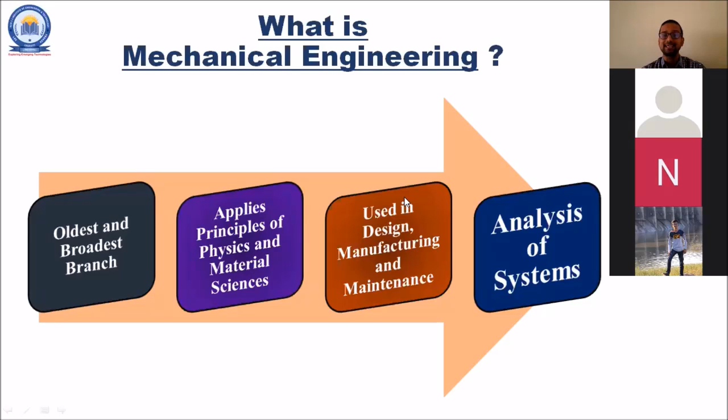Okay, no issue. So next, in mechanical engineering, basically it is also used for the analysis of mechanical systems. And friends, being the engineer, whenever we are designing or developing any product, we need to check the performance of the product. And for the performance, there must be the application of analysis. So basically, mechanical engineering is also used for the analysis of systems.

Proceeding further with the next topic, that is the applications of mechanical engineering. So dear friends, the first and the simplest application of mechanical engineering is in the field of automobile engineering. Right now, majority of automobile engineers are using the concepts of mechanical engineering.

At this point, let me ask you one question. Since you are the students of computer engineering, how can the use of computer engineering be applied to the automobiles? Or I am repeating the question, what is the use of computer engineering in the automobiles? So kindly give me your answers in the chat box.

Okay, Devers has given the answer: we do it for the self-driving and all. Okay, embedded systems are applied in the automobiles. Very good answer. To set up the software in the cars. Okay, that is also one of the answers. Digital screen, one of the good answers that now we are seeing on our dashboard. Also, the applications of robots and artificial intelligence, very good.

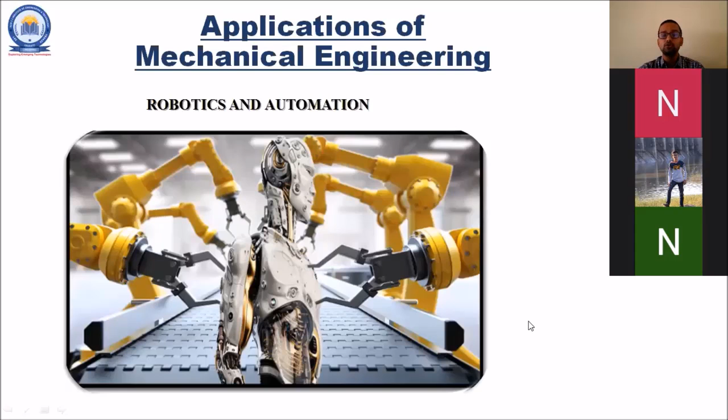Fine, fine. So this session is very interactive and I hope you are understanding all the points. So proceeding further, now this is one of the interesting questions. Whenever I explain the subject to computer students, the first question in your mind is, sir, we are students of computer engineering, so why do we need to study the subject of basic mechanical engineering? Let me know from you how many students were having this question before attending this lecture. Please reply in the chat box. How many students had this question before attending this lecture?

Okay, one of the responses I have got. Dev has also replied to me. Very good, Divya Panchal has given a reply. Some of the students are raising their hands. Okay fine, very good, so you are having this question, right? So now let me clear your doubts.

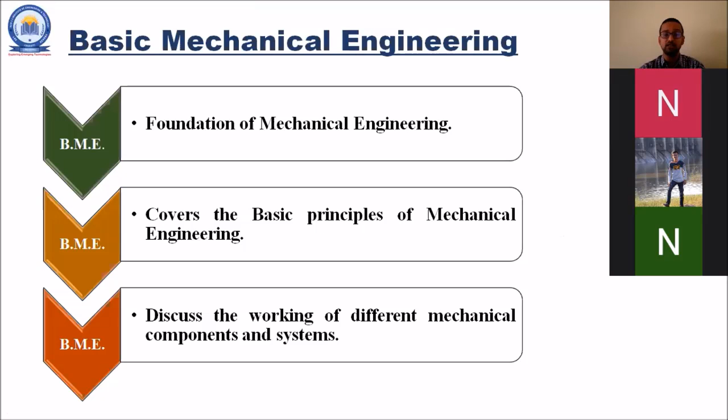So friends, basic mechanical engineering, in simple terms we name it BME. This subject is the foundation of mechanical engineering. Basic mechanical engineering covers the basic principles of mechanical engineering, meaning the basic concepts which need to be understood in mechanical engineering. All those basic concepts will be covered in this subject.

And finally, basic mechanical engineering as a subject discusses the working of different mechanical components and different mechanical systems. So this is the overall importance of studying this subject in the first year. And friends, according to Gujarat Technological University, this is a common subject which needs to be studied by all engineering students.

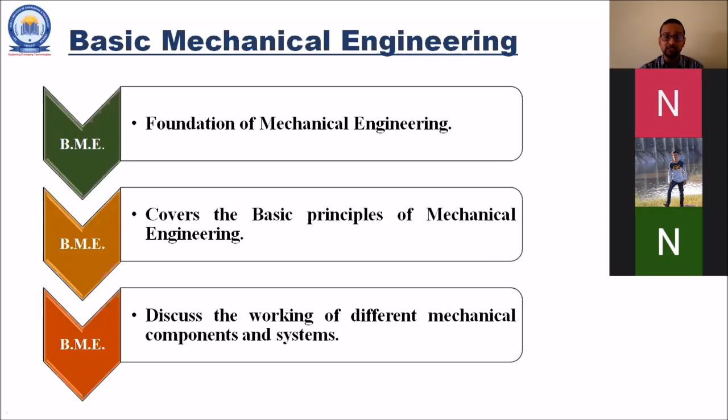Proceeding further with basic mechanical engineering, this subject's complete syllabus is divided into 4 modules - module 1, module 2, module 3, and module 4. Now let us understand these 4 modules in some detail.

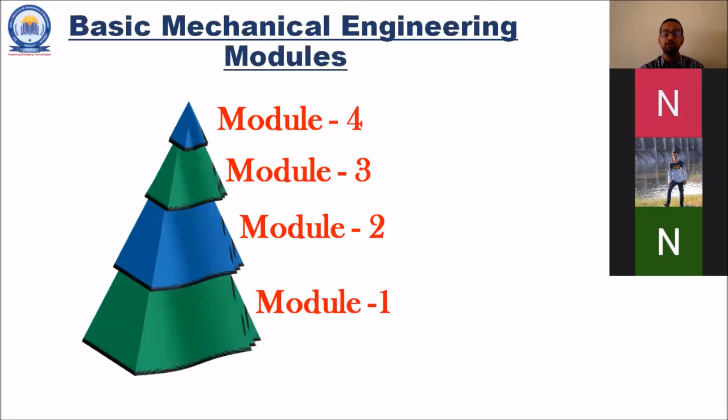Moving further, this is the percentage weightage of the different modules. The first module will have a weightage of 25%. The second module will have a weightage of 30%. The third module will have 20% weightage. And the fourth module will consist of 25%. So friends, if you sum all the percentages, you will get the answer that is 100%. So the complete syllabus of basic mechanical engineering is distributed in these 4 modules.

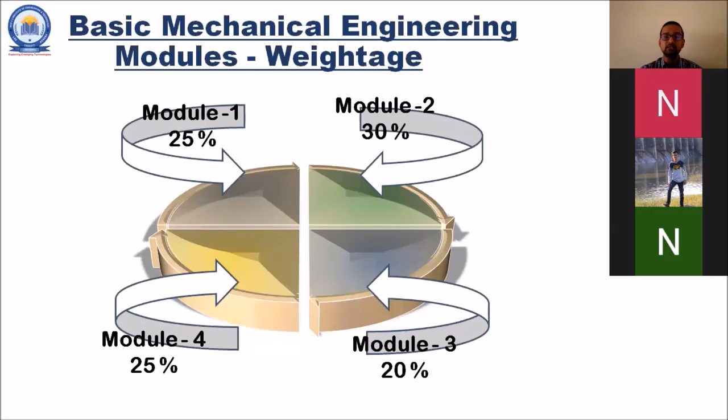Proceeding further, now let us understand the different chapters covered in each module. In the first module, there are 3 chapters. The first chapter is the introduction, which is very simple and one of the interesting chapters. The next chapter is the energy chapter.

And friends, let me tell you, in the energy chapter, majority of the points you have already studied at school level. So whenever we discuss this second chapter, that is energy, it will be a very interactive session. The important chapter of this module 1 is the properties of gases.

Because friends, in the chapter of properties of gases, we will be making some analytical derivations. We will be deriving the equations for gases for different processes. And finally, we are going to solve numericals related to finding the properties of gases. So the third chapter is very important in this module, with a major percentage of analytical discussion, and we are also going to solve numericals related to properties of gases. So these are the 3 chapters covered in the first module.

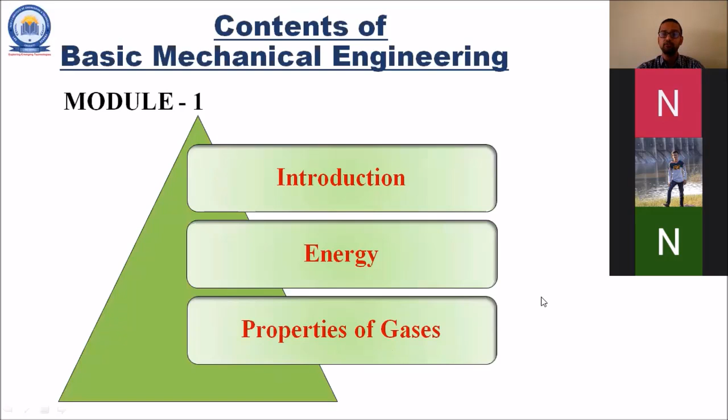Proceeding further with the next module, that is module 2, there are also 3 chapters. The first chapter is properties of steam. The second chapter is heat engines. And the third chapter is steam boilers.

And friends, if you remember the percentage weightage, module 2 has the maximum percentage weightage, that was 30%. So in this module, the 3 chapters are very important to be understood.

Proceeding further, the next module, that is module 3, again comprises 3 chapters. The first chapter, and one of the interesting chapters, is internal combustion engines. Dear friends, the automobiles which we use in our day-to-day lives, the majority of them use engines for developing power. So all those concepts of internal combustion engines we are going to discuss in this chapter.

Next we are going to understand the chapter of pumps, and finally we will understand the new chapter, that is air compressors.

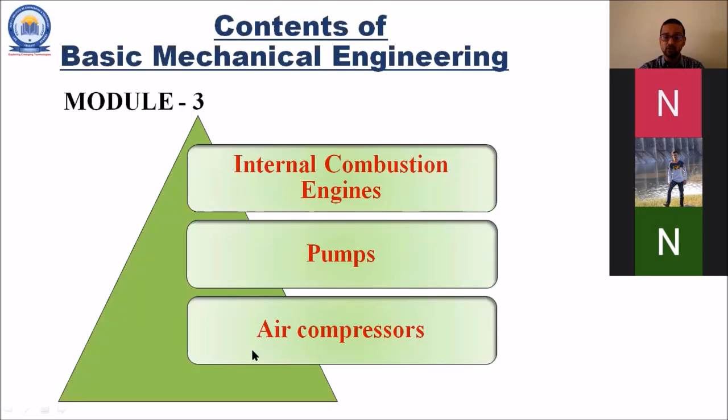And the last module, that is the fourth module, comprises again of 4 chapters. The first chapter is refrigeration and air conditioning. The next chapter is coupling, clutches and brakes. The next chapter is transmission of motion and power. And the last chapter is engineering materials. So friends, these are the different chapters distributed in the 4 modules respectively.

So I hope you have counted the number of chapters. Let me ask you the question: what are the total number of chapters in the subject of BME, Basic Mechanical Engineering? Okay, one of the answers I have got is 13. Very good, 13 is correct.

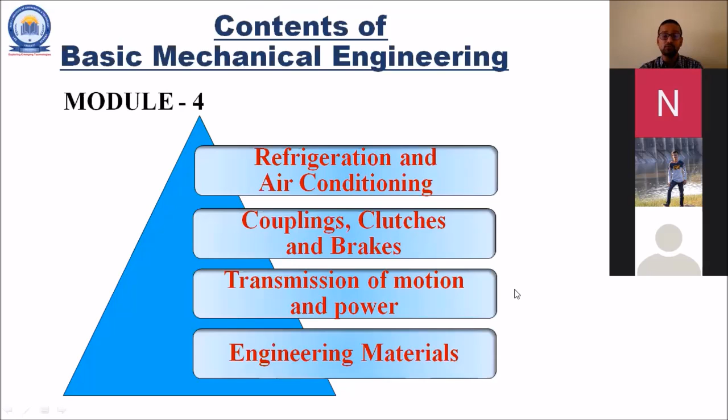So total there are 13 chapters in the subject of Basic Mechanical Engineering. And as we discuss all these chapters, you will be familiar with the concepts of the different chapters. Moving further with the discussion.

So friends, after studying the subject of Basic Mechanical Engineering, this is the course outcome. You will understand the various sources of energy. You will understand the basic terminology of the mechanical systems. Also, you will understand the various energy conversion cycles and systems. And finally, you will be able to make some elementary calculations for finding the properties of steam and gases. So this is the simple course outcome after studying the subject of Basic Mechanical Engineering.

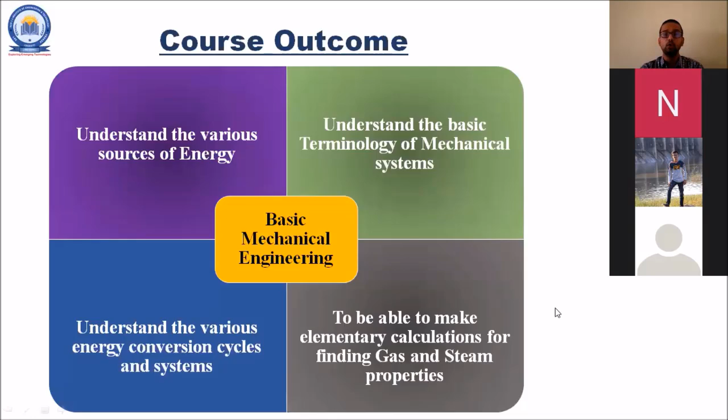Moving further, let us understand the examination pattern. Dear friends, try to focus on this point. Basically, the examination pattern is distributed in 2 parts: the theory marks and the practical marks. ESE stands for the end semester exam, and PA stands for the performance assessment.

The red portion which you are seeing, that is ESE, that is 70. This particular theory examination will be taken by the Gujarat Technological University, and this examination will be taken at the end of the semester, and it will be a theoretical examination. The remaining marks which you are seeing will be given at the institute level. Friends, if you make the total of all these marks, the total marks is 150.